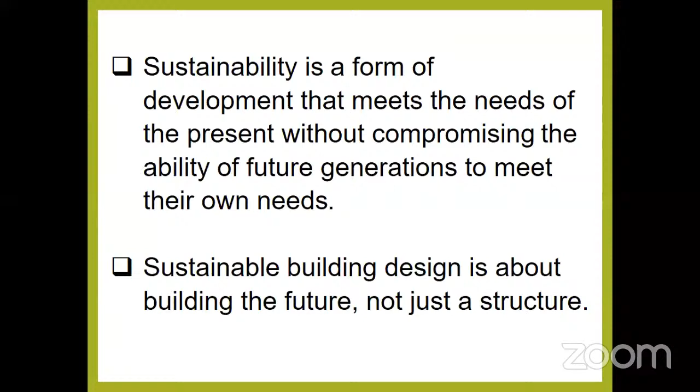Talking of sustainability, we need to know that it is that form of development that meets the need of the present without compromising the ability of the future generation to meet their own needs. In other words, it is basically maintaining balance in improving our lifestyles and preserving natural resources.

Talking of our own country and the world as a whole, we are facing unprecedented financial and environmental challenges in the pursuit of achieving rapid growth. This business model of growing at any cost, which we have taken up for so many years, has resulted in deterioration of economic activity and security of the environment. We've seen what the last 2 years have been to our planet with COVID. The reason of this deterioration, to our mind, is that more emphasis is being given on active design strategies. We are forgetting our vernacular architecture, our vernacular design systems.

So it is important that we go to the roots, we should see our design systems, we can go for natural resources and see how we can develop sustainability.

There's a silver lining now. Many webinars, many thought processes are being conducted on the word sustainable development. And that is important because until we move towards this new development paradigm, which focuses on economic resilience, improved quality of life and ecological sustainability, it's difficult to get out of this problem.

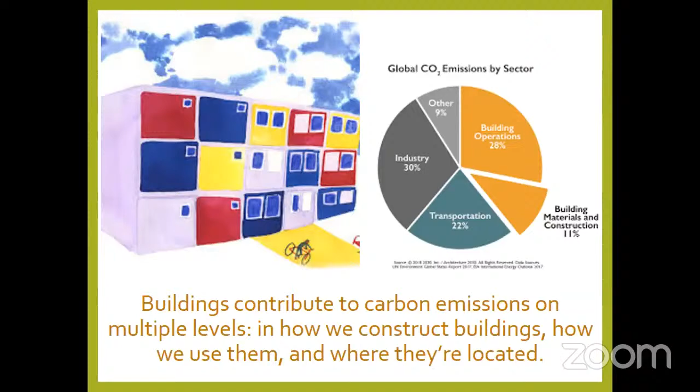Talking of our history, it had provided us with lessons which are invaluable, especially on living in harmony with nature. For thousands of years, if we see all our heritage buildings, before the advent of technology, people used to adapt to their environment and use nature as a guide to create their shelters.

Let us see some of the architectural applications. Our Indian architecture has always been innovative, always devised ingenious ways to make life easier without compromising on natural resources. Let us see some examples.

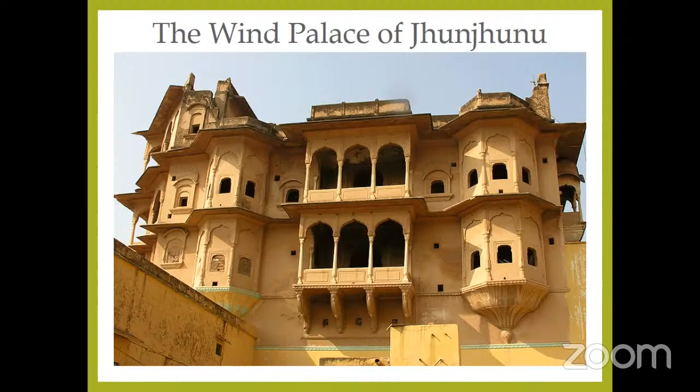This building we are seeing is the wind palace of Jhunjhunu, the Khetri Mahal. As the name suggests, this wonderful architecture allows the cool wind currents to blow through the palace. This is the inside structure of the palace. We see that it has been designed without any doors, without any windows. It only uses archways and pillars instead of walls. This ensures a continuous flow of cool air.

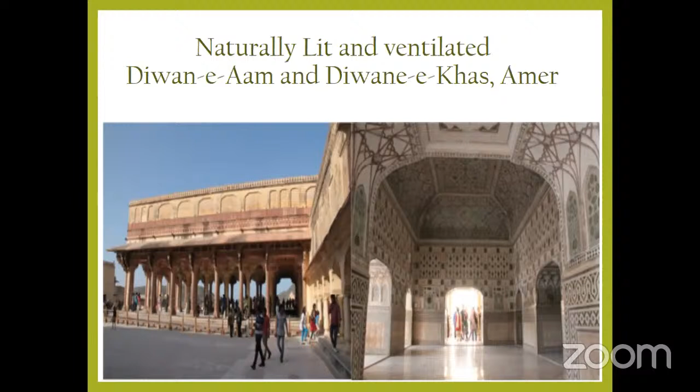Even when talking about the use of natural light and ventilation in this fort, it has been made to the fullest extent. Since there was no electricity or fossil fuel, natural lighting and ventilation had to be taken up as priority. Places like Diwan-e-Khas and even Diwan-e-Aam were designed without walls and had adequate day lighting and ventilation.

So after seeing all these examples of architectural marvels and our rich history, it's important to question ourselves. We as urban planners, architects, engineers, professionals need to go back to the drawing board and history books to take a lesson or two on how to design green buildings and create sustainable cities.

We need to understand that not all innovations are high-tech. Sustainable design should include many natural and low-cost ways, if possible, like older generation devised methods to use natural resources like air and water.

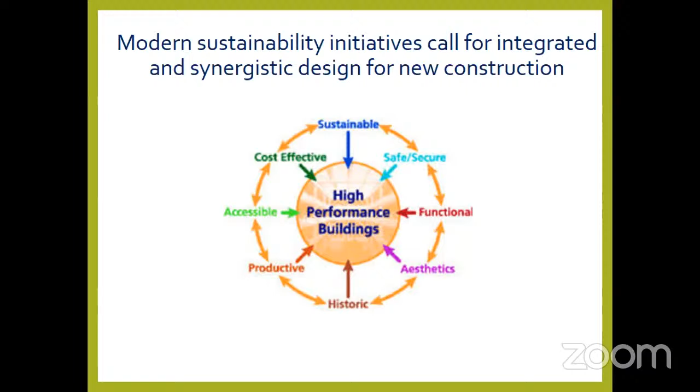Therefore, modern sustainability calls for initiatives for integrated and synergistic design for new construction. And the solution for this is switching from regular buildings to high-performance green buildings. And for that, an integrated design approach is required, which looks into all possible alternatives related to design and materials. And that is the crux of our webinar.

So there is a pressing need for us today to look for construction technologies, designs, materials to produce inherently low energy buildings. Not taking much more time, I would now call on our first speaker of the day, Mr. Sandeep Narang. He is a senior consultant.

A brief of Mr. Narang is that he has more than 30 years of experience after completing his civil engineering from Delhi College of Engineering. He is a respected and well-known veteran within the infrastructure and construction domain in the country. He consults on projects on prudent use of resources, and helps project teams meet their green and sustainability goals. The projects he consults on are related to outdoor air quality and optimization of water usage during the construction phase. He is also senior advisor to ASSOCHAM GEM Green Building Council, Green Building Council.

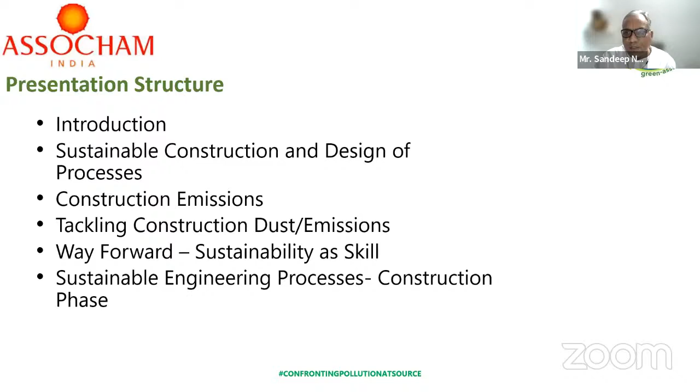I will follow this presentation structure: a small introduction on the works I've been doing. I'll talk a bit on sustainable construction and on construction emissions, that's air quality and construction, so that's one of my topics for today. Then I'll be talking a bit on tackling construction dust emissions, sustainability as a skill, and sustainable engineering processes during the construction phase. So that will be the flow of my presentation.

I'm a civil engineer and I practiced active construction for the first 28 years of my career. So I got interested in green buildings. Then somehow my focus shifted to clean construction, and I've been part of the National Clean Air Action Plan. So I'm in an advisory role to a few municipalities also. And I have done a few handbooks also on clean construction. You will see them through my presentation.

The National Clean Air Action Plan deals with various contributors to ambient air quality, like emissions from industries, transportation, and even our construction. So there's road dust management and construction debris management, they call it. The way they are contributing to outdoor air quality—Faridabad and Delhi, we live through the worst outdoor air quality areas in India. So what's the role of civil engineering? That's the thought process over here.

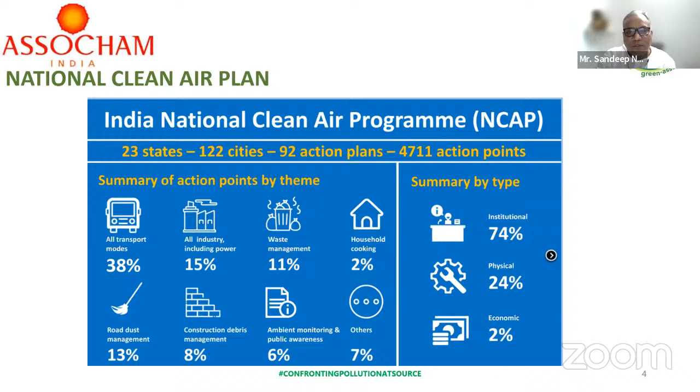Now we have been talking about sustainable construction, and we heard a bit on green buildings also over here. What's happening in this phase of green buildings? See, the design has gone green. During operations, the projects do show efficiency on energy and waste management, water efficiency, or other factors. But what's happening during the 4 to 5 years of construction? This is one of the gray areas which hasn't been addressed. We are not constructing in a sustainable way.

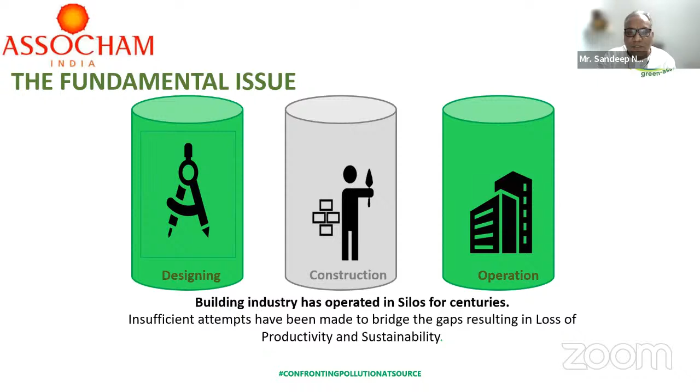So my work has been on sustainability during construction. Why is it happening? Because of low wages, low skills and ratings, being unproductive and inefficient. So these are very gray areas, because in the first 2 years when we design the project, we go for green building certifications.

During operations, we showcase all the efficiency parameters, but during construction, nothing. Concrete is happening throughout the landscape of India. So this is how the problem is.

My definition for sustainable construction practices is: if I am doing a project and I can showcase no wastage of water during the construction phase, or intelligent utilization of water during construction. Measurement of energy and water consumed during construction, and what should be the benchmark for energy and construction. Now with the lots of machinery being used at the project site, it's more than 3 to 4% that we spend on energy. Air quality and construction - this is the main topic for the day today.

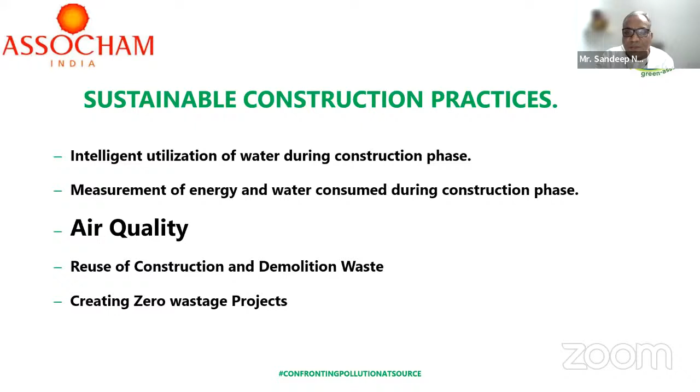Reuse of construction and demolition waste. Can we create zero wastage projects where the projects don't waste water, don't waste energy during construction, or care for air quality? So this is my definition of being sustainable during construction, or sustainable construction practices. I start with this slide.

As I have told you, I am a professional working in the field of air quality and construction, or clean construction. This media news is from the day one of GRAP. GRAP is Graded Response Action Plan. When the air quality goes beyond 400 AQI, they stop the construction, or they start thinking in terms of stopping the construction. That has been happening over the last 5-6, say 6 to 7 years, in the NCR region.

On the first day of GRAP, that was October 7th last year, the Honorable Environment Minister of Delhi government goes out for a visit to one of the project sites in Pragati Maidan. And he sees that although there is a fogging machine or smog gun over there, there is no water in it. The tarpaulin net has been put up for show, either in parts or was completely torn apart. And he fines that particular project 5 lakh rupees. That's okay, 5 lakh rupees, fine.

So what's the big news in it? The big news is that the company constructing that project was L&T. L&T is one of the premier construction companies in India. Now, if L&T is getting fined in Delhi for not being able to showcase restraint on air quality, what's happening to the others? So we will be doing a root cause analysis of this slide as we go through this presentation.

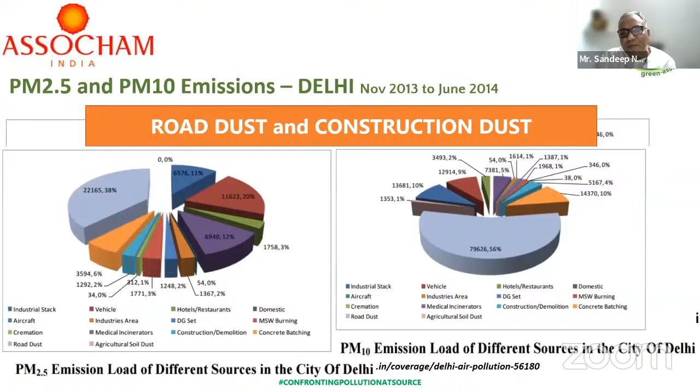And going through this pie of Delhi, PM 10, PM 2.5, road dust and construction dust - these are close to the tune of 50%. Another information I would like to share is that during summers, PM10 construction - this is a study from TERI ARAI 2018 - during summers, PM10 contribution is 41 to 43%, and PM 2.5 is 35 to 38%. During winter, it's less.

But our works get banned - construction is stopped during the winters. So we should be working on construction emissions throughout the year instead of just thinking about it during October, November, December. And another interesting topic is the pie of road dust.

What we see as road dust - what's the proportion of construction dust coming into the road dust? There are no studies, although I am part of a study happening in Surat with the World Resource Institute, where we are doing all these studies, and I'll be able to share the results as the studies get complete.

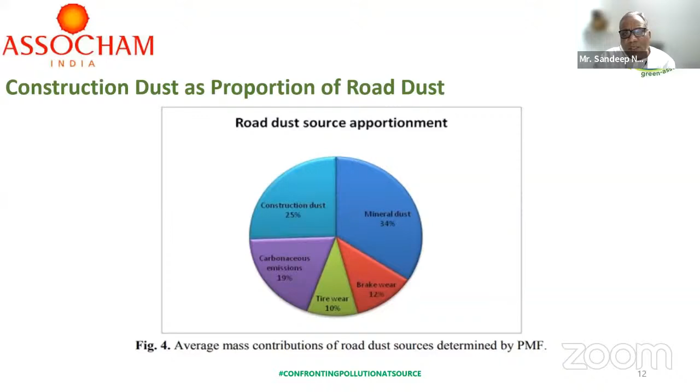Why is construction dust a problem? Because it creates health problems, respiratory health problems for the people who are working at the project.

It causes environmental degradation, including air and water pollution. It creates problems with visibility and safety. It damages and dirties property and belongings. And it increases the cost associated with the loss of material,

or even sometimes additional works get involved. How is it caused? It's caused because of demolition activities, site preparation activities, construction and vehicle movement, uncovered stockpiles. We all know these are the things.

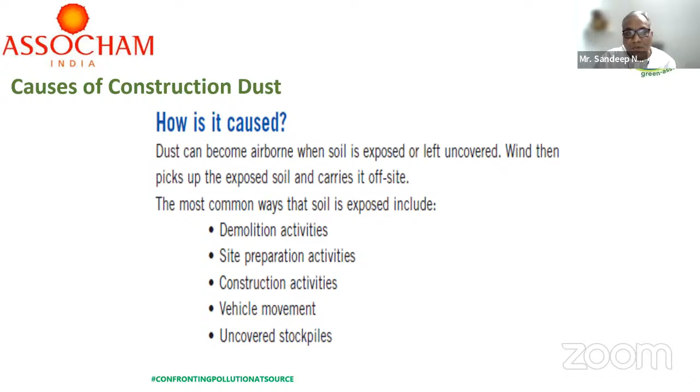And benefits, there are immense benefits of going for effective dust control to everyone. To the builder, it enhances their building reputation. To the owners, it reduces the risk of damage to property, to neighbors and communities, and particularly to the environment,

because if we can do clean construction, it's a reduction in air pollution, even in water pollution, and disturbances to existing flora, fauna and habitats. So these are the benefits of effective control of dust during construction.

And what are the constraints to construction dust or construction emissions? We primarily see two constraints. One is the soil type. In Delhi, we work with alluvial soil. So this is one of the constraints, because this soil is very loose in nature and it's mostly sandy

and clay soils. So when we disturb the soil, we get that PM 2.5 starts hanging into the environment or outdoor air quality, and somehow we see that dusty feel around the projects we are doing. Whereas this is not happening in the Maharashtra region - I'm also a consultant from Maharashtra region or Gujarat region - where we have those black soils and black and gray soils.

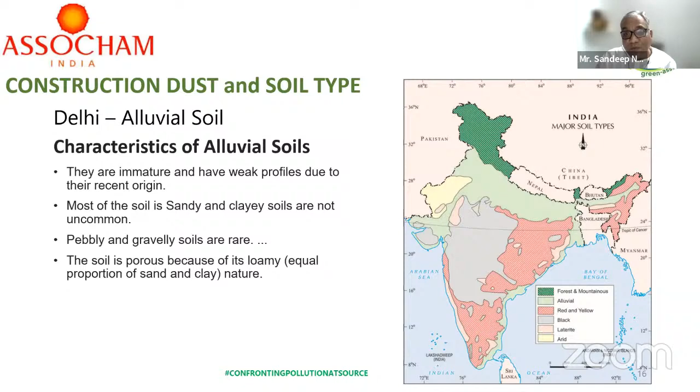So this is one of the biggest constraints, the soil type where we work in Delhi or even in Faridabad. And the second constraint is climate, because we are in this hot and dusty climate zone. Whenever we disturb the soil, it tends to hang more into the air. So construction dust is a bigger problem in Delhi, in this area we live in. With a view of construction dust, Delhi is at a disadvantage for both soil type as well as climate type.

And how do we tackle this construction dust? What are the processes? Basically, we need the help of three things: one is technology, innovative ideas of the project teams, and the third part is training and capacity building.

This is in our National Building Code, Volume 2, Chapter 11. I have even mentioned the page number, Approach to Sustainability, where NBC talks about restraint on noise, noise monitoring, water monitoring, and even ambient air quality monitoring. We don't do that at projects at all, although it's already mentioned in the National Building Code.

Now in Delhi, we have made it compulsory to monitor the air quality. Projects with 20,000 square feet or more have to put up air quality monitors, and somehow this is going strong, and this enforcement will be coming to other parts also.

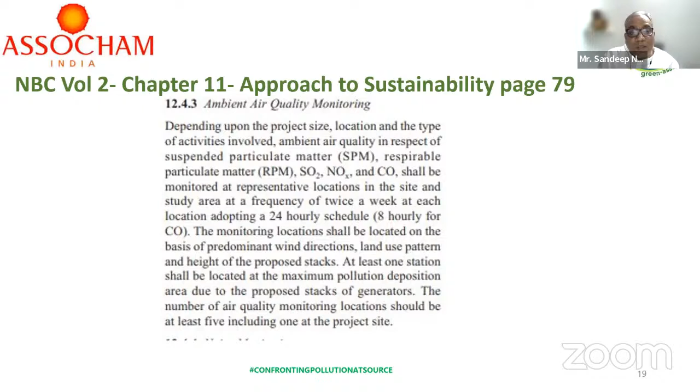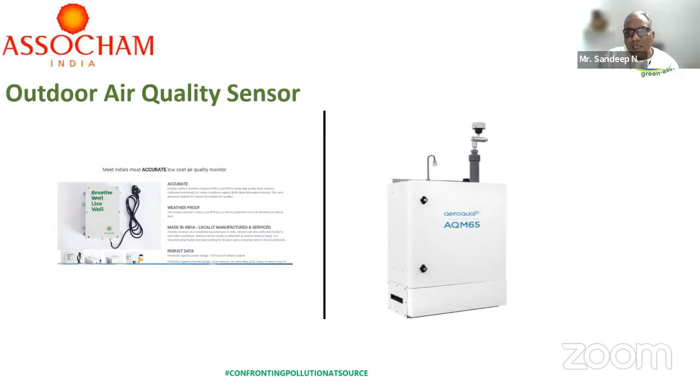And these outdoor air quality sensors prescribed by DPCC - I was part of that committee also, framing those 14-point guidelines - they are very economical. They don't tell you to put costly sensors for the research work. This Airveda sensor hardly costs 20,000 to 30,000 rupees, so at least we know what is the air quality of our project. These are similar project site outdoor air quality monitors from one of the Aeroqual company manufacturers.

The second is smog guns. Although I'm not a big fan of smog guns, I will share with you why. In Delhi, they have formulated a rule saying you have to use smog guns 3 hours in the morning and 3 hours in the evening. The construction professionals or the project team know about the processes, whether on that day those processes are happening at the site that will be emanating PM 2.5, PM 10.

And if the outdoor air quality monitor is showing some emissions happening, then we should be using these smog guns - it shouldn't be a blanket practice. Even if the work is not happening, I have seen them putting on these smog guns for 6 hours, and it's just a waste of energy and water. But they are very useful during demolitions.

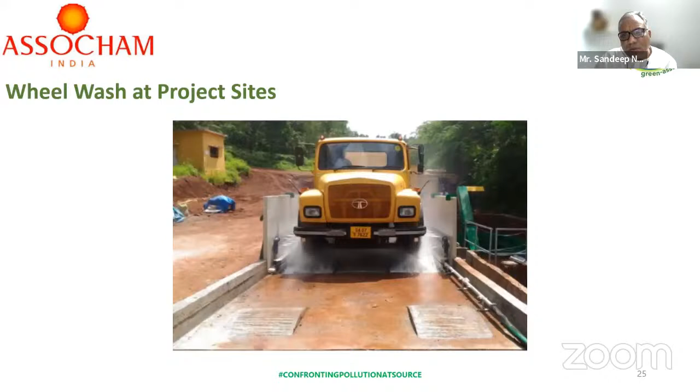They have to be used during demolition for settlement of dust. Again, wheel wash at project sites helps in not taking construction dust out from the project site. This is also not happening at lots of projects. People just don't want to, although it's not a very costly thing.

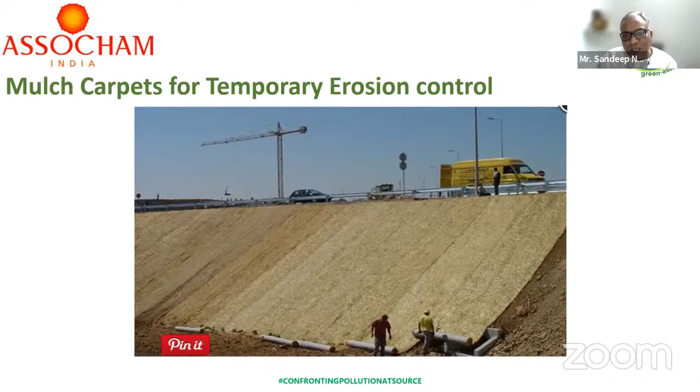Now this is the difference. This is a photograph from Kartarpur Sahib corridor in Punjab. This is how we construct roads, and this is how roads are being constructed outside India. They are putting a mulch carpet, and this mulch is the same thing that we burn during winters, causing lots of disturbance to the air quality of the capital. This comes from that parali only.

We can make these mulch carpets instead of burning them in September and October. Hydro seeding, hydro mulching - these are a few things we don't use at all, and they are highly inexpensive ideas for controlling emissions from construction projects. We see a lot of open batching plants where they should be closed batching plants. So I've given you a few ideas of where construction dust comes from and what we should be doing to control it.

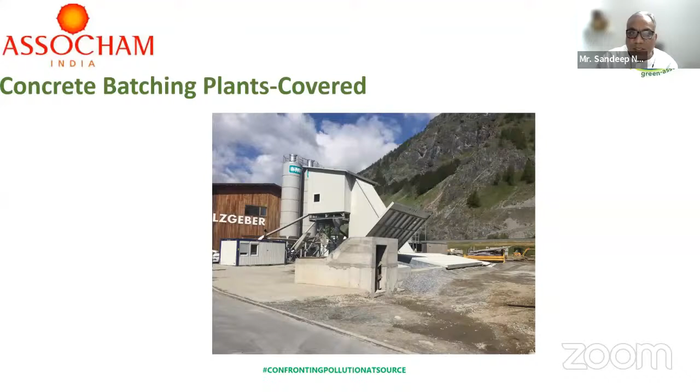We have a project schedule at site where we know which activity is happening when, but we don't create a construction dust mitigation schedule. It's a very small effort if companies can start making one, so they know they won't get surprises from the pollution control board saying you have to do this. You can plan in advance from day one about how to mitigate construction dust.

How do we counter that? At project sites, for management, we go through a loop - observe, orient, decide, act - we call it the OODA loop. We do it for the security of a project, putting up signages saying you have to wear helmets, don't touch wires. But nobody will see any signage for observation of project staff on sustainable construction - on not wasting water or not affecting air quality.

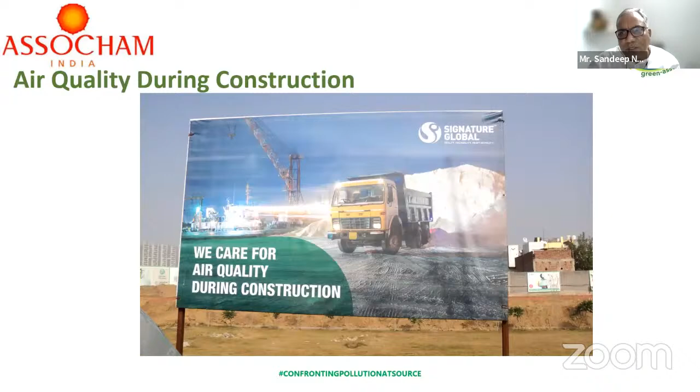This is signage at Signature Global Project in Gurgaon. I am part of this also, doing sustainable construction practices over here.

This is very interesting. This is air quality monitoring report from Trimurty's Divinity, 31st March to 15th April. Because the work is happening at lower basement level, there is nothing happening at the top. There are hardly any deviations in PM 2.5 and PM 10. We are doing monitoring at 12 PM and 6 PM, the two hours when the project works are at the topmost stage. So the builder is very confident. It shows this, my project is not giving any emissions.

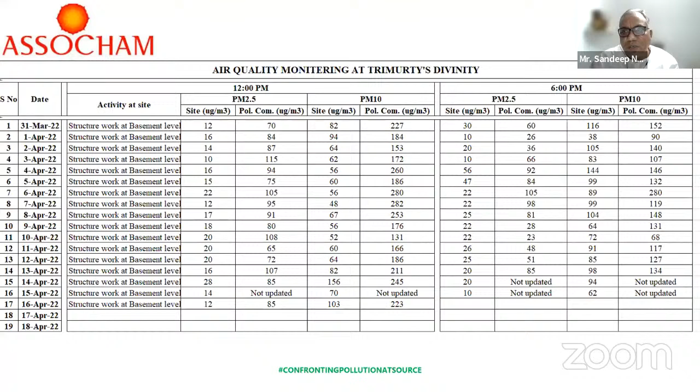There are only a few times when a construction project sends emissions into the air, it's not happening every time. And we are getting banned, our construction is getting stopped, we are put as a bad label just because we are not monitoring our air quality. So this is the company policy of Trimurty Group again.

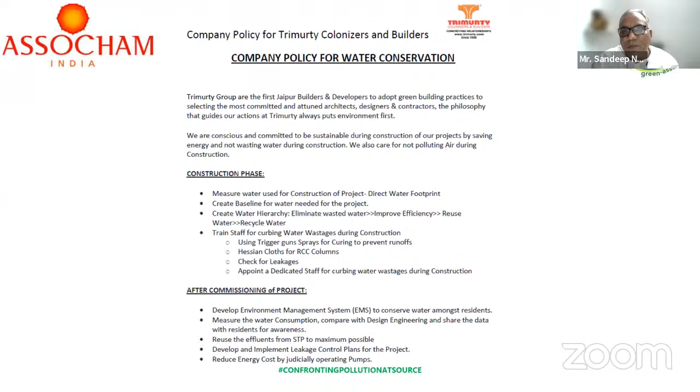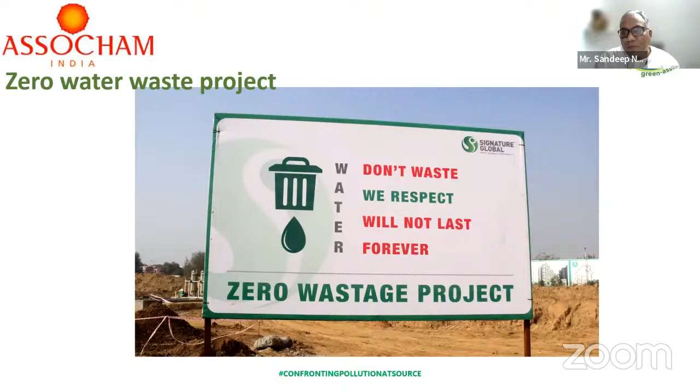In multi-story construction, if you see water in the basement, it means runoffs have happened at the upper floor during construction. The idea is to create zero water wastage projects. We should be having these signages at project sites, and the intent of the project team should be not to waste water or air quality. This is what I call the takeaway from today.

Understanding construction dust generation from processes, constraints from soil type and climate, being innovative for dust mitigation. Nobody from Europe or the US can come and tell Indian engineers, okay, you have to do this to mitigate the dust. We have to be innovative and do our own stuff. Measurement of ambient air quality at site, creating policy for dust control at site, training and capacity building of the site.

At one of my programs, the L&T project manager or project head who was manning that site when the project got fined met me at Delhi Secretariat and he said, Sandeep sir, you are absolutely right, we missed on that point.

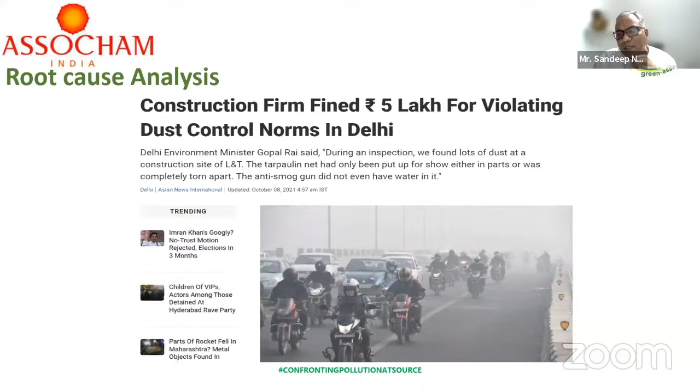So I will request all the engineers attending to do this. We have to spend nothing and we can take off 80% of our construction emissions just by using small processes, as Indradeep Saab also showcased, by being sustainable and having the right intent, we can take off 80% of our construction emissions.

So my request is to be proactive in tackling construction dust. Projects should showcase technology support and policy. Project teams should have knowledge and ideas of how to mitigate construction dust within the construction boundaries. And I sign off with this: in the race of excellence, there are no finish lines, and we civil engineers should be aiming for the race for excellence.

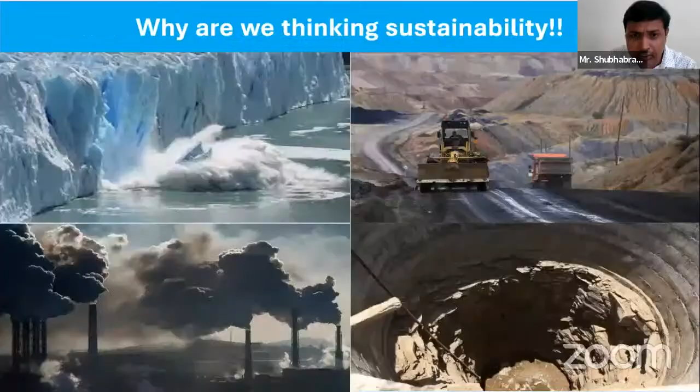So why am I quoting this? Let's take one step back. Sustainability - we're talking about design, construction - a lot of things worldwide, not only in India. Why are we talking about it? Is there anything, what happened recently? Are we scared? Are we thinking the glaciers are melting, that's why we should do it? Or maybe the energy, the fossil fuel divisions - fossil fuels are not renewable, so we are talking about non-renewable and renewable energy sources.

Maybe the coal is running out of stock, or maybe the groundwater level is going down so that we cannot use it anymore. So is that the reason we are scared of it? Is that the right approach? Or is there anything else that can be added here?

When you're talking about solutions to these things, about on-site renewable energy, what happens is when you're talking about design and construction of a building or nation building, we're talking about renewable energy, right? Solar power, wind power, and what else? We're talking about passive design structures, and that Mr. Oberoi just showed with Hawamahal and how the intricacies are there.

There are a lot of examples where there was rainwater harvesting, even in our heritage buildings. There is some temple which used the complete solar rays, and these people built it up when there was mostly no energy, maybe. No energy means the way we look at energy or electricity today. The electricity was not there, the way we pump out water sources did not exist that time. They used to do this hydro-turbine kind of power manually or in some other ways.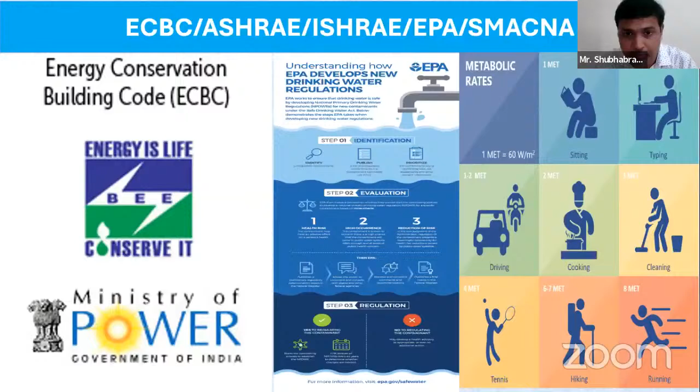So the point I want to raise is, does it end here? Let's say everyone gets some kind of bylaws that say okay, do it, and they accept it. And let's say all the reference guides we're talking about, ECBC, ASHRAE, or whatever, are all in line. The triple bottom line of social, economy, and environment is changed - profit, planet, and people, we call the 3 P's of life. Everything is set, let's say in the next 5 years. Does it end there? Does our responsibility end there?

Because what might happen is the students listening might think, okay, everything is in the bylaws, we have to do it, so what are the issues there? Why are we so concerned about it, why are so many people talking about it day and night - about design, about optimization, about natural resource conservation - because everything is right now in the correct step?

See, the thing is that it does not end there. The reason is, even if you do something good right now, unless and until you make it a lifestyle, it will take 1 to 2 to 3 generations to do that. If that practice does not become normal, then it will come back to whatever we're doing right now, and all these bad things will shoot up again.

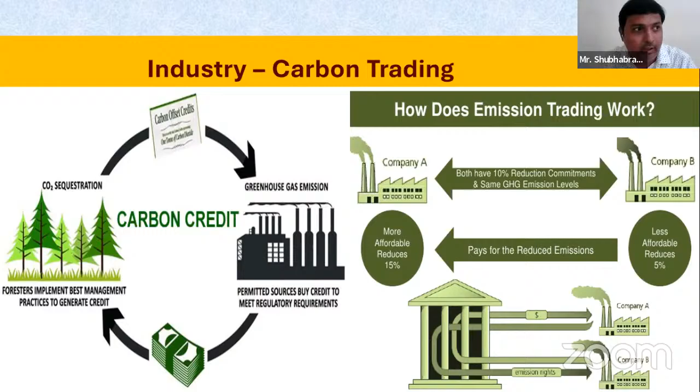And when you go to the industries, we talk about how we are trading, how we are talking about natural resources - carbon trading, where for every equivalent carbon dioxide produced in some places, we've fixed a price that can be paid somewhere else, and we put some on-site renewable energy centers there, and get some kind of credit. Now it becomes a kind of business model.

So my point is that when we talk about natural resources, optimization of natural resources in both design and construction, the definition has to be set properly. The first thing for sure is that it's not only about putting it in the bylaws, not only about putting it in some kind of reference codes - that is the first step, a major step. But the other step is also putting it into the consciousness, putting it in the definitions of ourselves, everyone. Then only will everyone do that.

For example, a few years or decades before, there were health campaigns for polio or some other diseases. Those diseases are not existing right now because it took 2 to 3 generations to take that thing away. That is how we are also planning to make this sustainability initiative, and it's upon us.

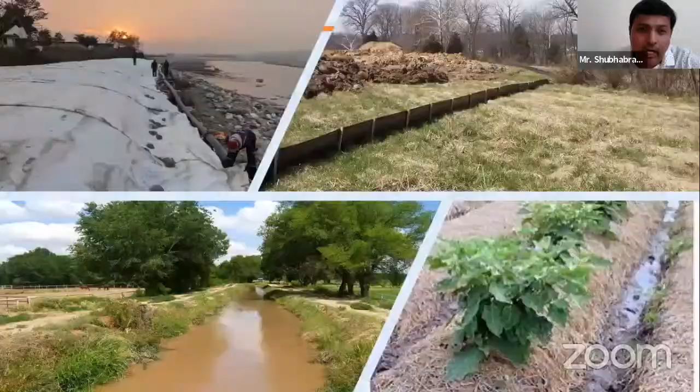If you talk about the aesthetic point of view, sustainable building design and construction is the way out. It's not only about saving life. One example Sandeep mentioned was soil erosion control. There are a lot of strategies that cannot be undermined. It's in the NBCs, but we are not following it properly. If we follow it properly, a lot of other things can happen.

For example, if you preserve the topsoil, that topsoil can in the future yield so much vegetation around us. If not inside the campus, somewhere else also we can put it there. And right now we have all the technologies available. We have sun path diagrams available, we have wind rose diagrams available.

When all these resources are available, it becomes much easier for us to build something, compared to, for example, the passive design structures in heritage buildings. We cannot underestimate the fact that these people built it centuries before, when they didn't have any kind of software modeling assessment tools available with them. But right now we have everything with us.

We can make daylighting modeling very fast. In one day, people can simulate daylight simulations, how things will work if we put glass versus a wall or a roof or some kind of skylights. There are a lot of permutations and combinations that can be tested without doing anything, without any costing, sitting in our lab. So why not do it?

It's not that sustainability, doing sustainability, is right now very much costly. It's actually right now easy, and it should be the way forward.

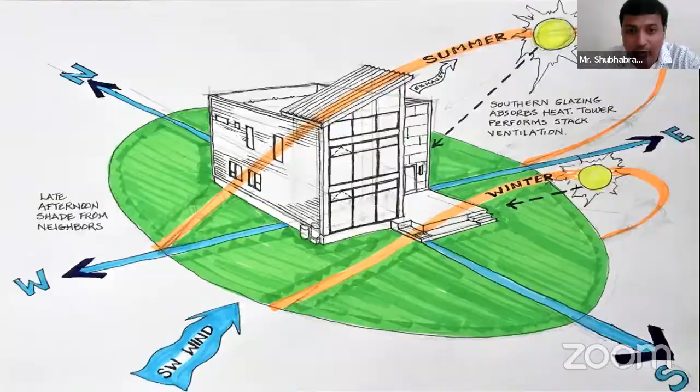This you can see when we are trying to make something cooler. Cooler means there are two skyscrapers, let's say, and there is a road in between. In a lot of places, our standard practice was to make concrete roads inside, so that the heat coming there gets trapped and sometimes cannot escape outside. If you go to Gurgaon, you can understand this in many places.

Why only Gurgaon? Even in Ahmedabad, I have seen places with skyscrapers and so many glass facades, and a road, where heat could not come out, and literally in the summer season the concrete and all these things melt. The upper layer kind of melts there, which is not good for us, not good for human lives, not good in any way.

So there we can have certain kinds of strategies. It just needs sensitivity. Costing does not make much sense here. Sometimes we think sustainability things are costly. It's not like that. If you make a paver block like that or some other arrangement, our architect Rupaliji is there, so she can explain how it can be done. A lot of things can be done.

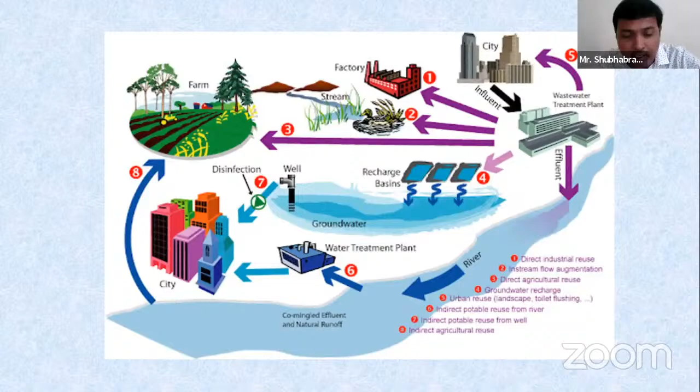Rainwater harvesting, drip irrigation system, dual flush toilets, and this water cycle, we can use the same water cycle, not only conserve it but also recycle and reuse it in many ways. Even in our landscapes we can use it, in our fountains and basins we can use it, and it is pretty easily available. All those designs, strategies, and related fixtures are available in the market, not at a very expensive price.

Also talking about organic waste conversion and waste management, not only in construction but also during occupancy, there are measures. There is sewage treatment, there are converters also available. There is organic food waste which people are right now converting into energy as well. So many options are right now available. So why be bothered about anything else rather than learning the art of it?

We can use fly ash bricks anywhere wherever applicable. We can do a lot of things with bamboo sticks, because instead of using hardwood, we can use bamboo. Why? Because bamboo is a very fast growing plant. A bamboo plant can grow very fast. If you take one bamboo plant out, it will come out faster than any bigger plants like banana trees or anything.

So why not to use it? Coming to the energy design proportion, these kind of things should be in our mind. All these things somehow relate to our nature, and they are at the building level - the design, then the efficiency of the equipment, then the efficiency of the operating plants.

The next step will be energy and behavior education. This is where we need to lay a lot of emphasis, because we have energy designers available in our nation. We have efficient systems available. We have people working all the way to make it possible, and operating plants are also available.

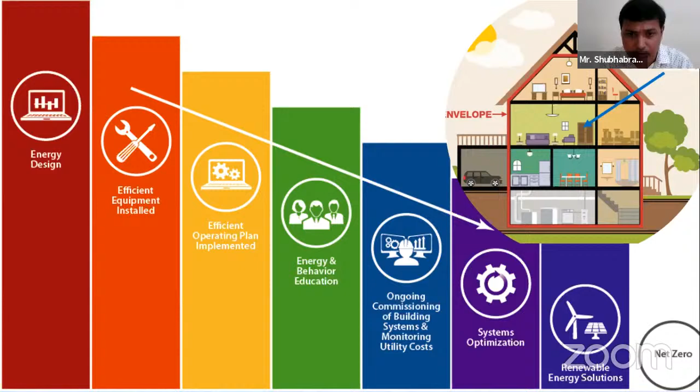That's why I chose this topic called psychology, because energy and behavior education is what we need to emphasize if we want optimization of natural resources in design and construction of buildings. Only then can we truly move towards net zero buildings - whether talking about energy, water, any natural resources, even combating air pollution. So this is the gist of it.

The gist is that psychology - what is going on in your mind when designing or constructing something - there are a lot of informed suggestions, informed decisions that are readily available and doable. We have a lot to refer back to in our heritage buildings as well, and put it in the current context, because those heritage buildings existed in the past, but the past does not exist now. What we can do is alter it a little bit.

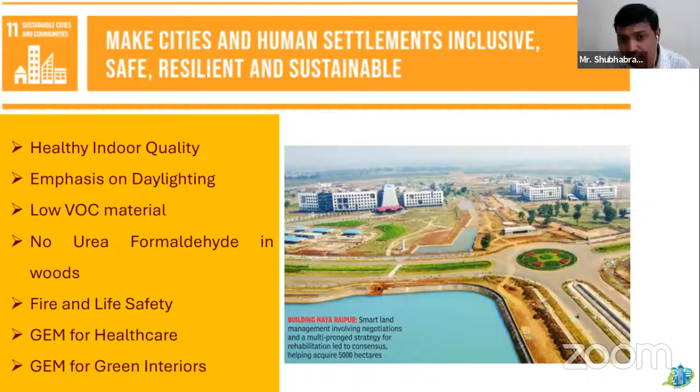The just one thing that we are missing here is that awareness, that consciousness that okay, we need to do it and we need to do it for a long term. So that's the way it is right now.

I'll not take much time. These are just glimpses of how everything is interrelated, how everything is interconnected. If we do one thing, it's not just that we are not getting noticed. No, we are giving our contributions to a myriad of things in both design, construction, profit, planet, people, economy.

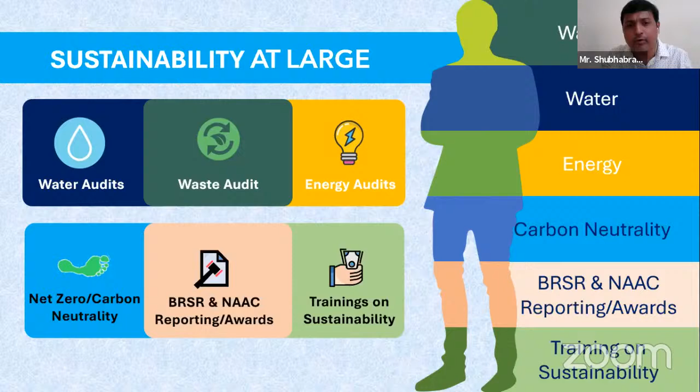And the national determined contributions, we call it NDCs, which are national goals set up by United Nations. So that's why we also have kind of MOUs, coming back to SHM, what we are doing. To achieve this, we have made MOUs with leading agencies and universities as well to go into the conscious level of students. And we are also doing some kind of waste audits and all these things as well, so that all these things can be taken care of holistically in the design and building industry.

So here is my number and my email ID. You can just refer here, and if you have any kind of doubt, any kind of questions or queries, please let me know. Thank you.

Thank you, Mr. Rath, for your intriguing presentation and deliberation. In fact, summing up, what you mentioned is that you've taken a different perspective altogether of how to perceive sustainability as such. And it's very right that old habits die hard. It's very difficult to change old habits, but it'll take some time. We have to include it in our lifestyle and see how we can actually go towards the goal of sustainability.

One thing which I really wanted to understand was that you rightly said about concrete paving and everything, because urban heat island effect is a main problem today for our urban areas. I think designers should come up with new innovative techniques wherein this UHI effect should be reduced. At the same time, we should have water percolating to our groundwater so that we should have good groundwater levels.

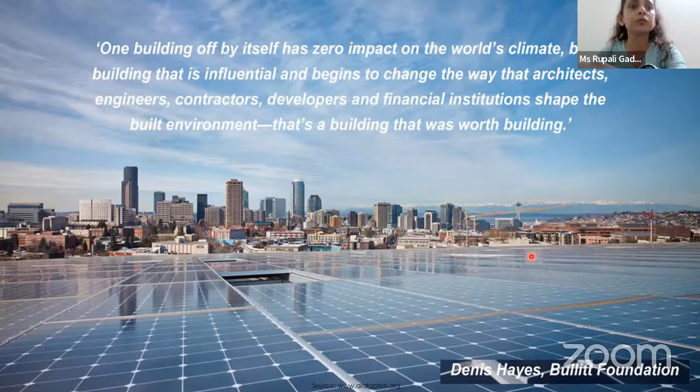One building off by itself has zero impact on the world's climate, but a building that is influential and begins to change the way that architects, engineers, contractors, developers, and financial institutions shape the built environment, that's a building that was worth building, says Denis Hayes from Bullitt Foundation. And I completely agree with that. I'm going to take you through a case study of Bullitt Foundation in a while.

Activity in sustainable construction continues to increase, some of it marking the continued evolution of thinking about how best to achieve high standards of efficiency in the built environment, while at the same time promoting human health and protecting ecological systems.

More than any other human endeavor, the built environment has direct, complex, and long-lasting impacts on the biosphere. And as we all know, the construction sector is one of the major emitters of greenhouse gases.

After the first significant efforts to apply the sustainability paradigm to the built environment in the early 1990s, the resulting sustainable construction movement has gained significant strength and momentum. Increased CO2 emissions, climate change, pollution, depletion of finite non-renewable resources, population increase and increased consumption, and the need for creating a resilient built environment are among the main drivers of this movement.

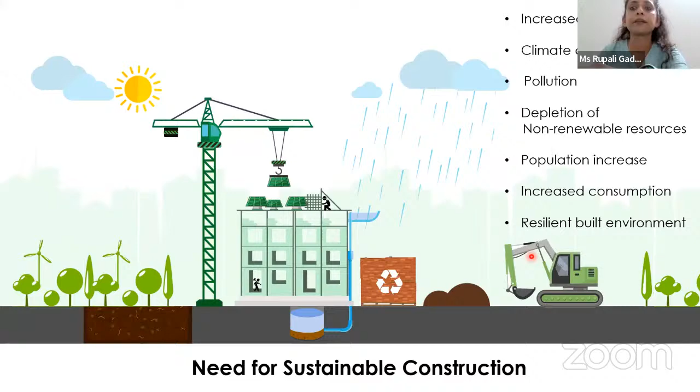So what is sustainable construction? According to Raynsford, it's all about ensuring a better quality of life for everyone now and for generations to come through social progress, which recognizes the needs of everyone and maintenance of high and stable levels of economic growth and employment, while protecting and, if possible, enhancing the environment and using natural resources prudently.

Thus the term sustainable construction most comprehensively addresses the ecological, social, and economic issues of a building in the context of its community.

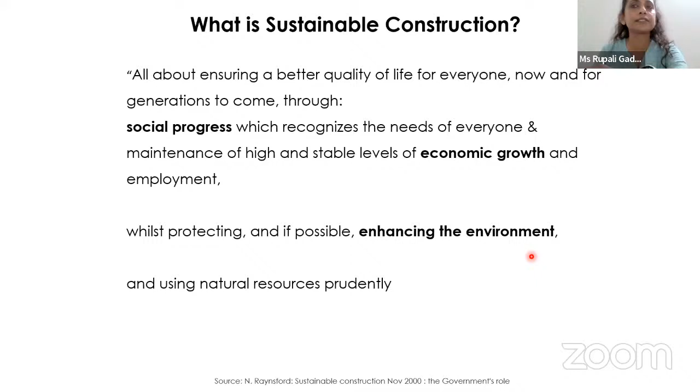This always integrates, as I've explained in the earlier slide, different dimensions of social, economic, and environmental aspects. Some examples of social dimensions are protecting and promoting human health, social inclusion, and satisfaction.

Some aspects of economic dimensions are using life cycle costing, productivity, support of local economies, and profitability. And some examples of environmental dimensions are conserving natural resources, creating a healthy, non-toxic environment, and waste minimization and management.

There are about 60 different assessment methods for sustainable construction or green construction. In India, we generally use GRIHA, EDGE, or LEED certification.

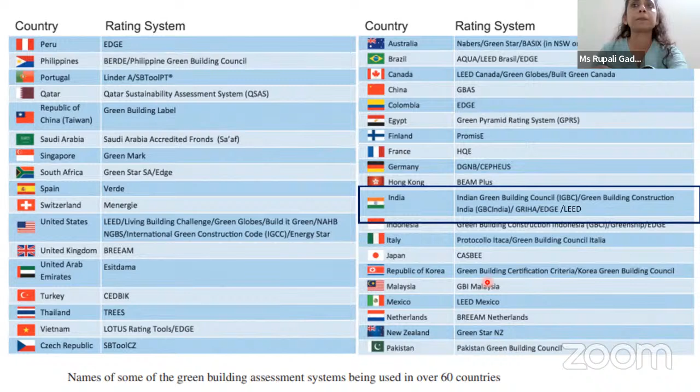Now let's look at different natural resources we need to consider: land, materials, water, energy, and ecosystems. The principles of sustainable construction are reduce, reuse, recycle, protect nature, eliminate toxins, life cycle costing, and quality.

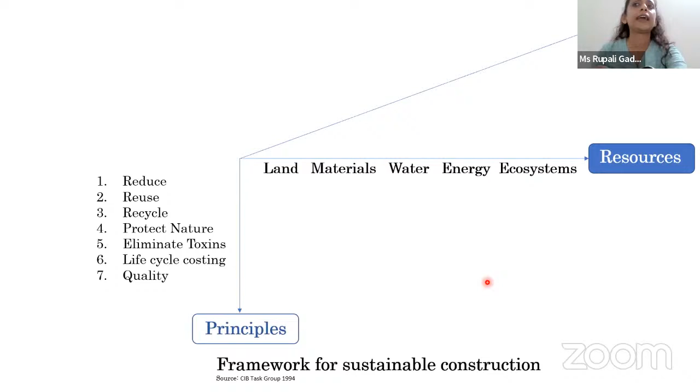We have to consider this during all phases of construction and post-construction too. But for the sake of this presentation, I'm going to focus on the planning, development, and design phase.

This is an integrative building design, and at its heart, a collaborative multidiscipline design process. Contribution from all stakeholders is very essential.

We have to learn from the past, as we saw in the earlier presentations. Learn from the past, think holistically in the present, and consider the future. Also, we have to think across scales—think global and act local is a wonderful axiom for designers. It urges the consideration of global effects on each design decision.

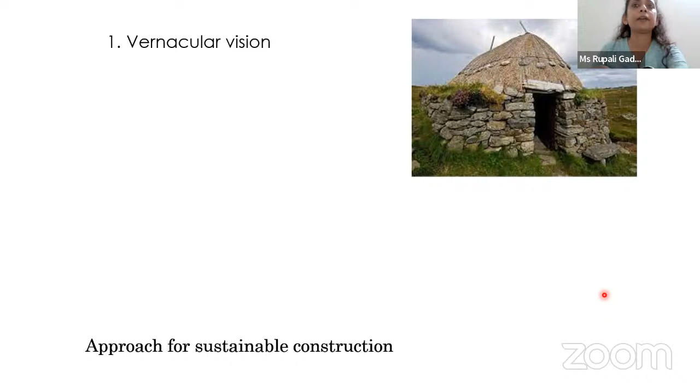Approaches to sustainable construction include the vernacular vision, because it embeds cultural wisdom and an intimate knowledge of place in the built environment, the high technology approach, and the biomimetic model.

This biomimetic revolution is now considered to be a major guideline towards more sustainable built environments, meaning that the building refers to the technical translation and realization of functional strategies used by organic systems in nature.

It's a 6-story, 50,000 square foot office area, and it has pursued guidelines outlined by the Living Building Challenge, the most rigorous green building certification program. I have chosen this case study as all information is well documented and available to everyone in various ways.

The Bullitt Center had a single goal: to demonstrate the current state of the art in sustainable design in order to influence the development and operation of other buildings around the world.

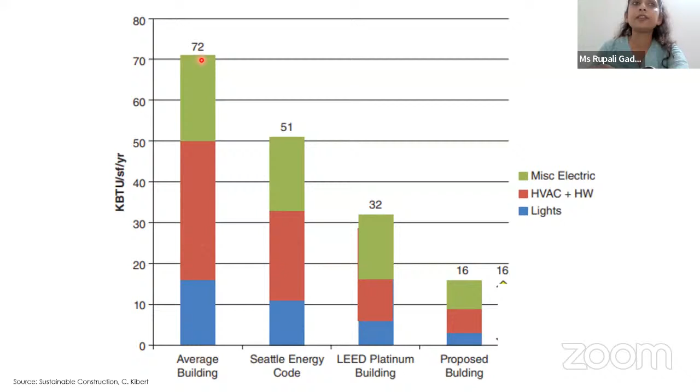So this is the energy consumption chart. An average office building, let's say, consumes around 72 kBTU annually in energy, and this building consumes only 16 kBTU, and that too is supplied by the solar panels installed on site. I'll explain in the next few slides how they've managed to get it down so drastically.

So talking about natural resources: land and site ecology.

Pre-development and old growth and site surveys, historic site surveys, is very important. That's how this adjacent 104-year-old park is now linked to the center. Actions to revitalize this neglected urban space include native planting, materials reuse, and development as a new urban gathering space. This wouldn't have been possible unless there were historic surveys and information, vernacular information gathered.

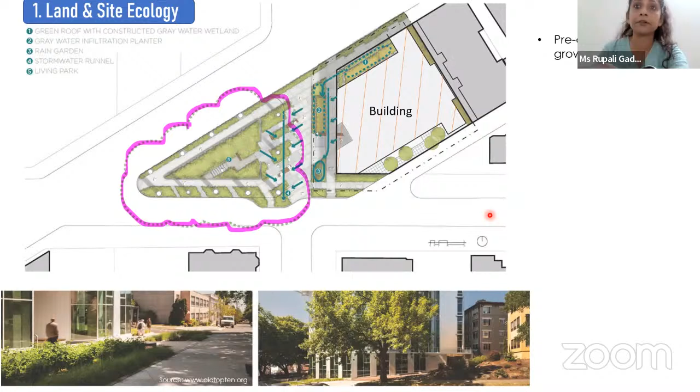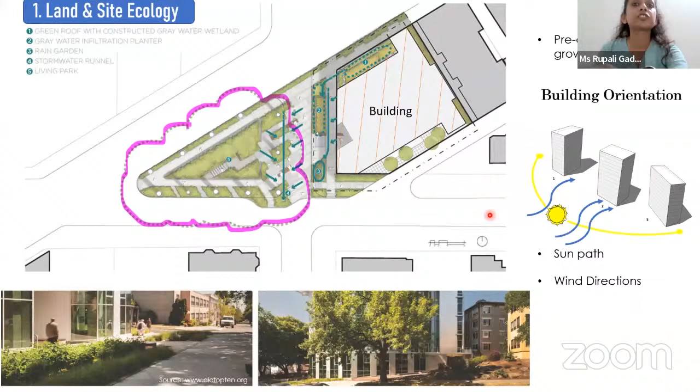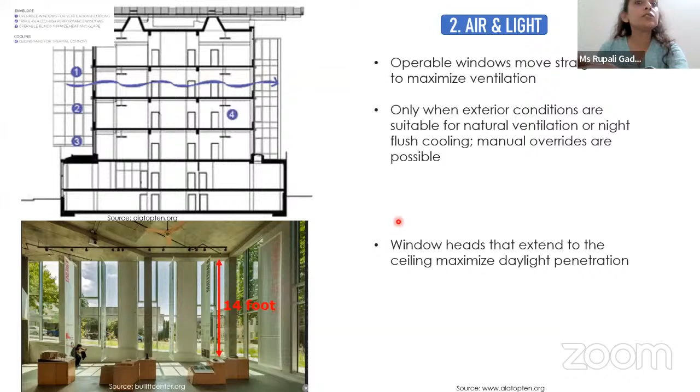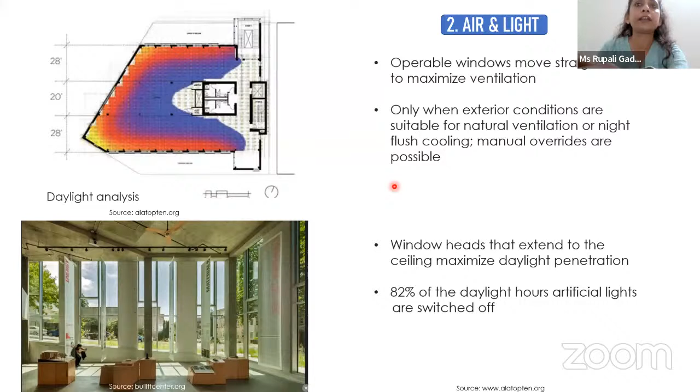Even on sunny days, fully automated exterior shades take control, to avoid any excessive glare. That's how the interiors receive a lot of daylight, and the large windows give ventilation as well as connection to the outside views, and that's what brings - the design improves health and well-being of the occupants.

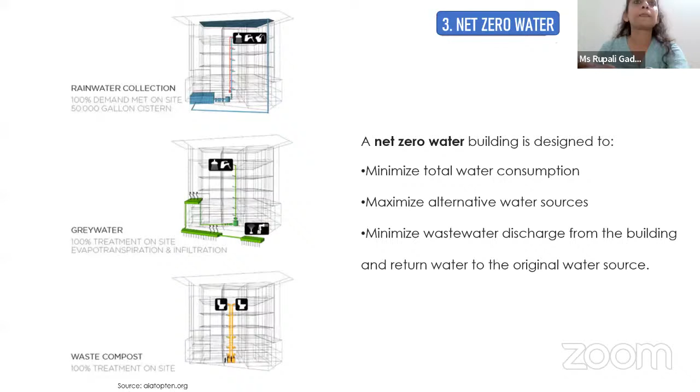Now talking about water, it's a net zero building. A net zero water building is designed to minimize total water consumption, maximize alternative water sources, minimize wastewater discharge from the building, and return water to the original water source. They have managed 100% of the water used in the center comes from captured rainwater, as you can see here. Grey water is treated and reused in the vacuum flush toilet system. Excess grey water is returned to the soil to help recharge the aquifers. Human waste from foam flush toilets and urinals arrives through these pipes to the basement, and compost is made out of that, and then it's used for soil amendments.

This center is designed to help restore the ecological processes of the site back to the way they functioned hundreds of years ago when it was a forest. Like a forest, the Bullitt Center must use only water it can collect on site, and they have achieved that. As you can see the numbers, if you mimic the forest conditions, these are the water levels, and this is what they've achieved even after construction.

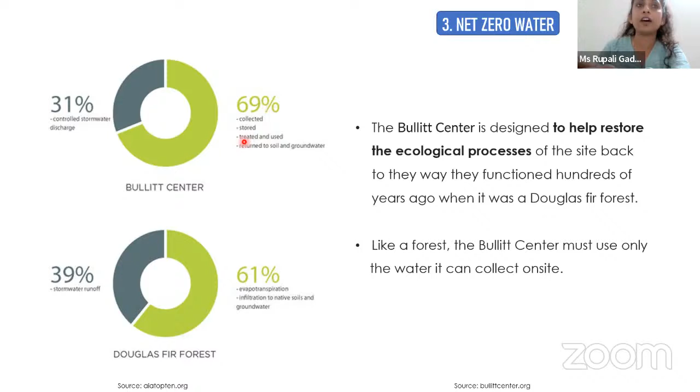Then talking about energy, net zero energy - meaning the total amount of energy used by the building on an annual basis is equal to the amount of renewable energy created on site. The goal is that the building contributes less overall greenhouse gas to the atmosphere during operations. They've got the energy requirements down in various ways, and the 575 solar panels take care of that entire energy requirement.

Looking at a path to net zero energy, a typical office building of the same size consumes around 92 kBTU annually. They've managed to bring it down to 42 by using high performance glass, high performance walls, low infiltration, ground source heat pumps, radiant slab cooling, operable windows, operable blinds. After this, they've managed to bring it down to 32 by maximizing daylighting, daylight dimming, and changes in lighting power. Then the way occupants are using the facility got it down to 16, through maximum use of stairs, low heating set points, raised cooling set points, daytime office cleaning, and low flow fixtures, etc.

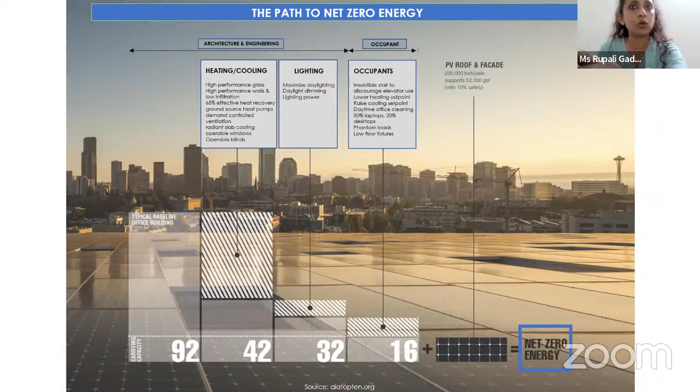Another sustainability aspect is the building's ability to maintain critical life support conditions—if services such as power, heating, fuel, or water are lost for an extended period, the building should still be able to survive. So this building is resilient, diverse, locally attuned, and able to leverage interdependencies and allow for change over time.

The structure is designed to last 250 years using heavy timber, concrete, and steel, while the outer skin is designed for 50 years because systems keep changing, and it can be disassembled as needed over time with minimal disruption to the other systems. They have open floor plates to accommodate changing tenant needs, and technologies such as photovoltaic panels are designed to last 25 years because technology keeps upgrading very quickly.

Talking about materials, selection of building elements is based on life cycle costs, and one of the most sustainable buildings is a building that lasts. All structural materials used in the center are locally sourced—within 300 miles for steel and concrete, and 600 miles for wood. With a concrete base, it has a heavy timber structure, and that wood was sourced from responsibly managed forests, lowering their carbon footprint. It also aligns with historic regional traditions and adds to the aesthetic appeal. The steel connectors provide seismic and fire safety reinforcement, holding the wooden beams together.

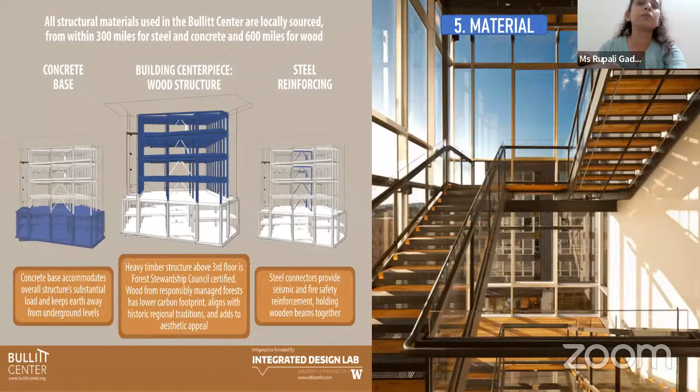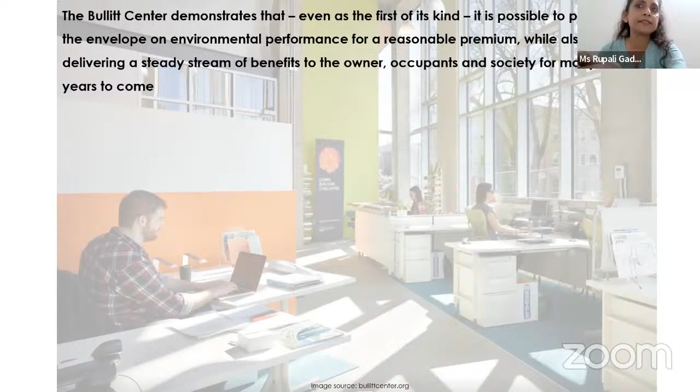The Bullitt Center demonstrates that even as the first of its kind, it is possible to push the envelope on environmental performance for a reasonable premium, while also delivering a steady stream of benefits to the owner, occupants, and society for many years to come. Today's society does not incorporate values related to public benefits into financial analysis, but that may change soon. I also have some information about cost analysis, but I haven't included it as part of this presentation.

So, optimizing natural resources like land, materials, water, energy, as we just saw, and ecosystem—the Bullitt Center has created a prototype high-performance urban office building, conceived as a replicable model of a commercially viable structure with essentially no environmental footprint.

Some examples across the world, and these are a few from India. India is an astonishingly growing economy, as we all know, and that's why the pressure on the use of natural resources is very heavy. We have rich traditions and history in holistic strategies for building and construction, as we saw in the first two presentations. But despite this, the sustainable building agenda currently receives limited attention. According to the Indian Green Building Council, the situation is improving and many buildings are up for certification.

I'm currently designing a sustainable school in Maharashtra and a few other interior and architectural projects. I feel with more awareness, everyone will again start adapting to sustainable ways of living. Thank you.

And those are a few references.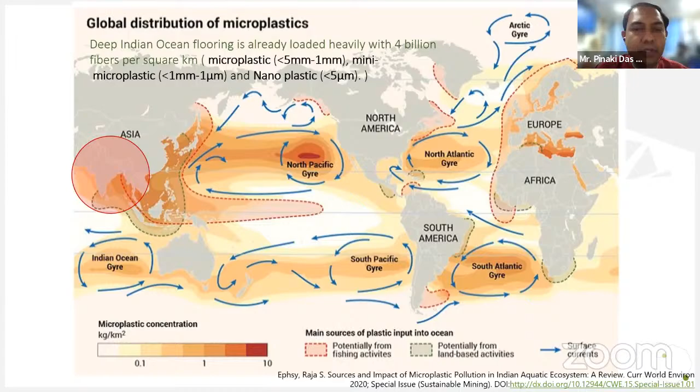Just to give you a brief idea of the pollution we are creating, I thought it important that we also have microplastics in mind. As you all will be aware, many items made from plastic of certain specifications, which we used to call single-use plastics, are now banned. So this is a kind of overview of how microplastics are moving throughout the oceans.

And every one of us on the panel has already mentioned that the 5 Ps are the basis of sustainable development. If we leave one P out, then it is not called sustainable development. So in the construction sector, in infrastructural requirements, we have to ensure that the 5 Ps are incorporated in every document, every rating, every doctrine, every law.

When we say people, this is very important because the people aspect is often overlooked as we talk about architectural needs or construction sectors. But people is all about health and safety, and I think that is more important - the quality of health, as Sandeep sir also mentioned, describing the air pollution aspect beautifully. But there is also waste, water, energy, and human rights.

In COVID, we saw that a lot of construction companies hosted their own workforces. They gave all kinds of assistance so that workers didn't have to venture out and were not left in any lurch. That is a very nice example of the people aspect in sustainable development.

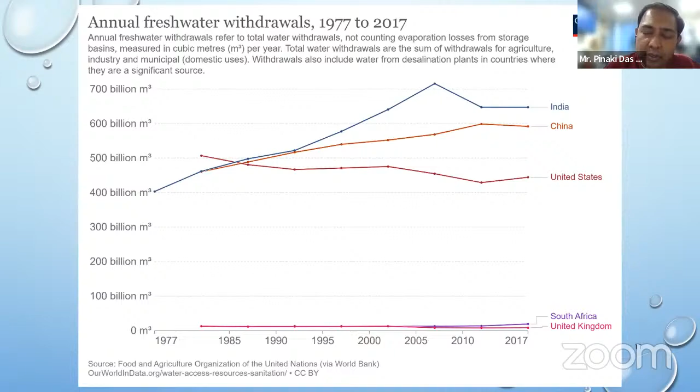When we talk about the environmental, you can say constitutional aspect, we see that it is well covered - Article 21, Article 51A, 48A. These are all very important because that's how we get motivated. That's how every builder, every engineer, every architect has to have consideration on all these aspects to truly make a project or a program really sustainable.

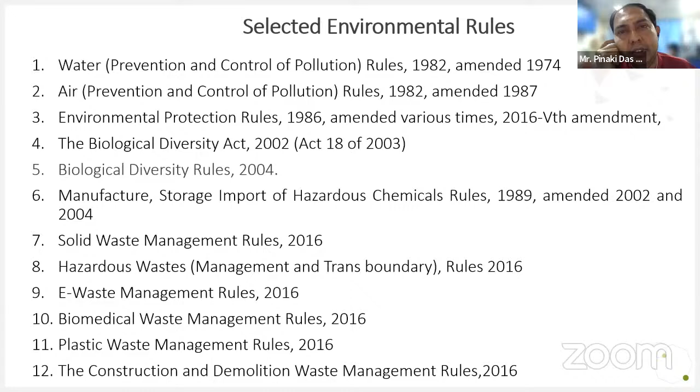These are some of the environmental rules. I'm not going to deliberate on each of them, but these are also the rules which we have to maintain when we do construction or infrastructure projects, for example highways, bridges, large construction, housing projects, all these type of things. Also India is a signatory to different kinds of international conventions which guarantee the protection of natural habitats. Also, we have right now EIA notification 2006, which has been modified in 2014, and there are a lot of other laws which give direction on how we make our project ecologically sustainable.

But when we talk about sustainability, and I would come next to it, it is not just about ecology. It is about emerging aspects too. So what we know about sustainability is this.

Sustainability is something which started in 1713. It was started in Germany by a guy called Hans Carl von Carlowitz. He was from the mining department, and he said if we continue cutting trees at a rate which the trees can't grow back, then there will be a problem in the future. So it all started there. Sustainability is not just three decades old, it is about a couple of centuries old that way.

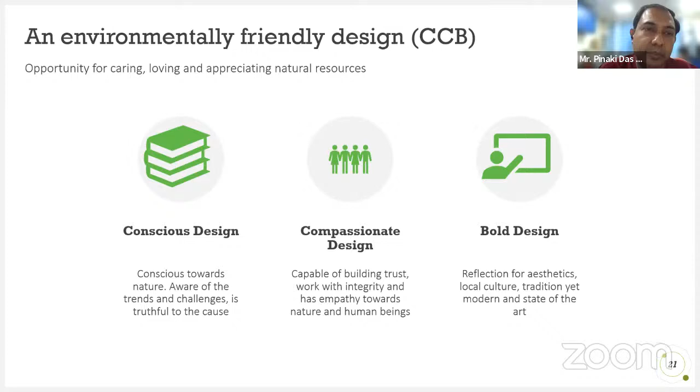So what are the optimization potentials? This has also been touched by Rupali, who nicely mentioned a case study that covered a lot of these things. But I just wanted to repeat, when we say optimization potential, what is that? We can look into several pillars, one being waste management. And waste management is not just solid waste management, it's about waste management for materials and for your own project. These are things we can do at the design phase, that's the best phase to plan, then comes implementation. But for the planning stage, it's very critical to explore state-of-the-art technology.

So I've written waste to energy. Why only waste treatment or management? Why don't we convert waste to energy? Because there are a lot of technology options available now, and we have to have the will. That's why Shubh's presentation is also important, the psychology has to be like this, not only for clients but also for us, for engineers, architects, MEP consultants. We have to have our own psychological orientation, and we have to move the big rock, move the barrier.

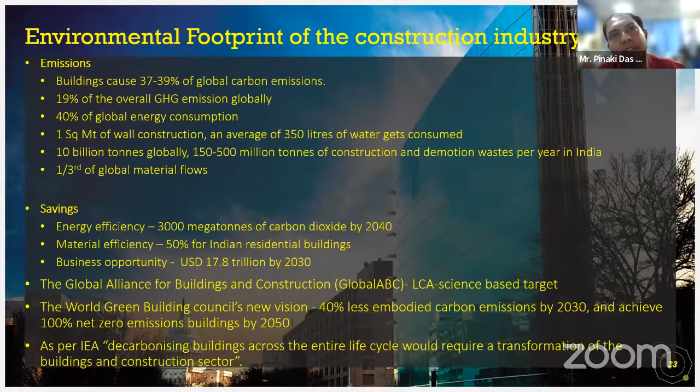So I think there's always scope, and the IEA declares, whenever they use the word decarbonizing buildings, that's a new phrase, decarbonization of buildings means the entire life cycle. You've seen in the example of the Bullitt Center that they took into consideration the life cycle of the building.

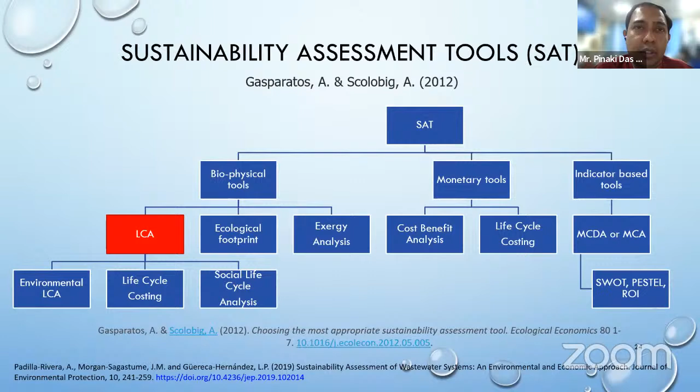So how do you do this kind of sustainability assessment? This is the last part of my presentation. There are a lot of tools through which sustainability assessment can be done, but one tool I'd love to touch on now is life cycle assessment. Life cycle assessment doesn't necessarily mean only environmental life cycle assessment, it also means life cycle costing and social life cycle analysis. These have been added. Life cycle assessment was actually framed 3.5 decades back by the Society of Environmental Toxicology and Chemistry, and then it was also revised by UNEP and other agencies.

I'm not going into those details, but just to give you an idea of how LCA works: basically we have three inputs, called inputs to the technosphere, and we have to have the bill of quantities for construction phase, operational phase, and demolition phase. For example, in construction we normally don't take demolition, but we take the entire life cycle of a building into account, the materials and the energy flows. Then normally we have the outputs in terms of emissions.

Now, life cycle assessment is not just about carbon dioxide or GHG emission. It provides impact categories, called midpoint impact categories, and when you do an analysis it's called midpoint analysis. When we do the final output, it's called endpoint analysis. There are different software available, SimaPro is there, Gabi is there, and a lot of other software too.

The entire fundamental of LCA hinges on the total embodied emission and energy and wastage, right from the construction phase to the demolition phase. So that is how the LCA works.

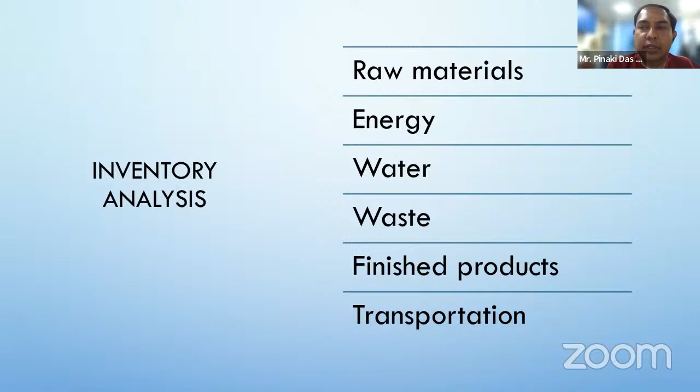So in the inventory analysis, we have raw material consideration, water, waste, finished product, even transportation. As I said, material transportation is also important, and the energy, both embodied and from the usage of energy during the occupation phase.

As I've told, it is also a midpoint. There are different kinds of analysis, midpoint analysis, endpoint analysis. These are not to be confused. Very simply, midpoint analysis are the different indicators which you get from conducting an LCA on how your project is impacting the environment, and you get some values.

So if we have these kinds of inventory lists, it might seem that they are very complex in terms of the raw materials or the inventory list, but we can readily measure them. For example, if you measure air pollution, we will get the values of SOx, NOx, PM 2.5, PM 10, ozone, and if we take the wastewater into consideration, we will have BOD, COD, total nitrogen, phosphorus.

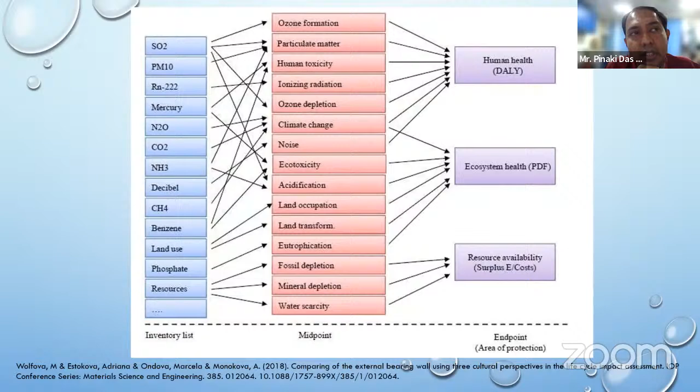Some methodologies are only for European Union, some are only for US. There are no methodologies developed for Indian conditions right now, but we normally use the globally acceptable methodology, which is called recipe, R-E-C-I-P-E. And when we talk about the endpoint, we have 3 indicators, which are human health, ecosystem, and resource availability. So these are important when we talk about LCA and the interpretation. These are all extensions.

And from the midpoint to weighing - what is weighing? Weighing is nothing but dividing your LCA values by a standard value. For example, we calculate air quality index, the similar way we also carry out the weighing and other things. So these are, I thought I'll give some examples.

Of course, this might be a little heavy for you, but very simply, if we take climate change into account, climate change is not only about carbon dioxide. Right now, we are very focused on carbon dioxide emission, everybody talks about carbon. But the essence here is to extend that to methane, CFCs, and nitrous oxide - how they fare in terms of climate change, then ozone layer depletion. And this is how the results pop up when you do the LCA treatment.

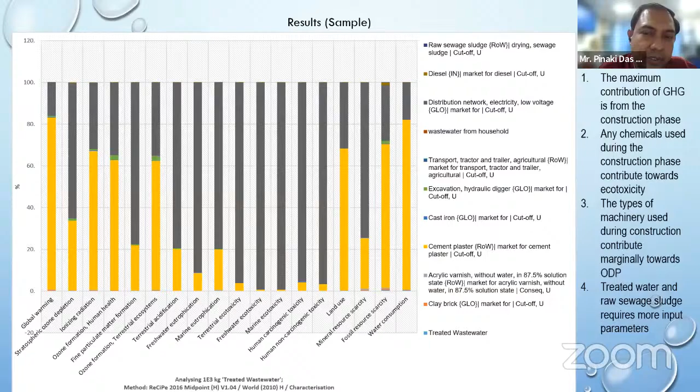So this is an example from my own research on wastewater analysis. Even when we say wastewater treatment is a sustainability measure, if you use a lot of paints, materials brought from far away, or polymeric membranes, that might not actually be sustainable compared to a more rudimentary, biomimicry-based approach using plants, algae, or other natural materials for wastewater treatment. But these are all decision-making considerations.

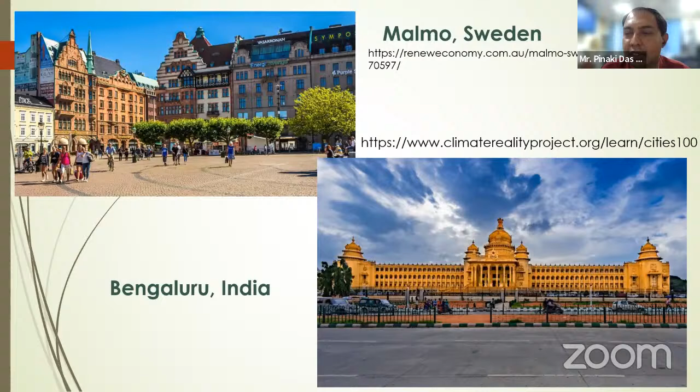These examples have already been given by Rupali, so I just thought I'd pop them up again. I haven't included the Vancouver Convention Center, but the vertical gardens and metro pillars are amazing—aesthetically nice, they provide a green touch, and they work. Going to the city level, Bengaluru and Malmo in Sweden are considered sustainable cities. Of course, Bangalore's traffic is a subject of discussion, but it's a nice city.

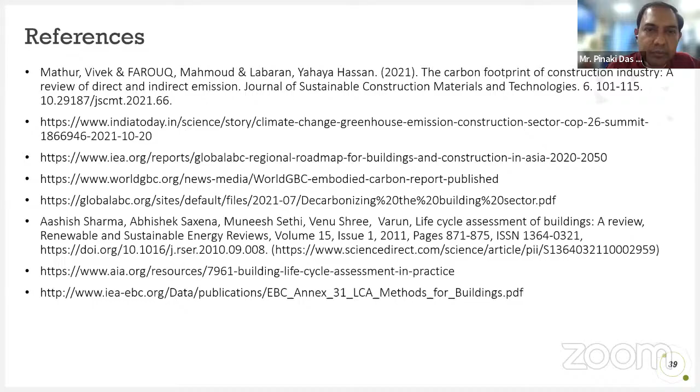This is one of the public projects, but we can also have collaboration across all buildings. So these are some of the references I have used. Thank you so much, it was a pleasure sharing my thoughts with you.